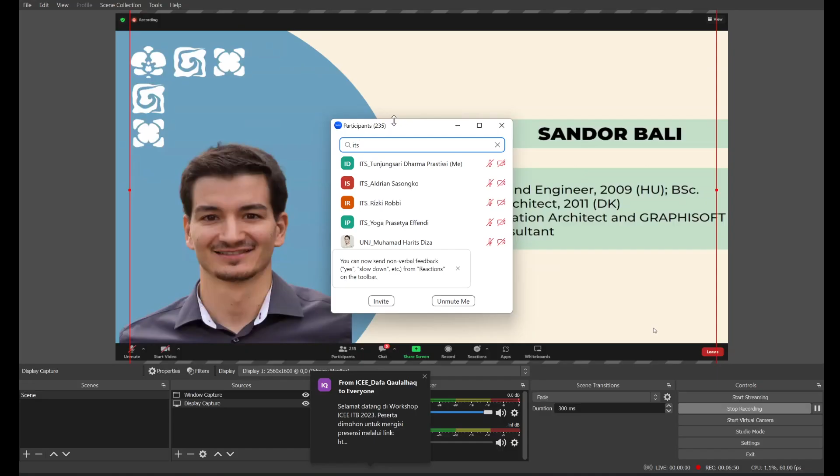Thank you. Okay, hello everyone, welcome. I hope you can see me now, and then I can start sharing my screen.

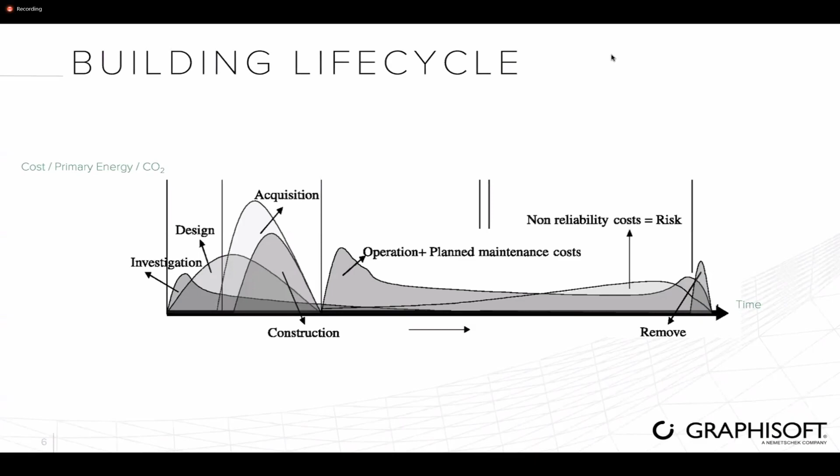But if we look at this diagram in actual scale, you can see that the building operation phase actually spans over 50 years, which, even though it's a lower amount at each segment, on a longer scale it actually matters much more and means more energy usage and demand than during the acquisition, construction, design, and early phases, or renovations and decommissioning.

That's why we have to look into this, because our buildings will stay here for at least 50 years, or usually that's what we aim for. And if we have a bad solution, then it's going to stay with us for quite some time.

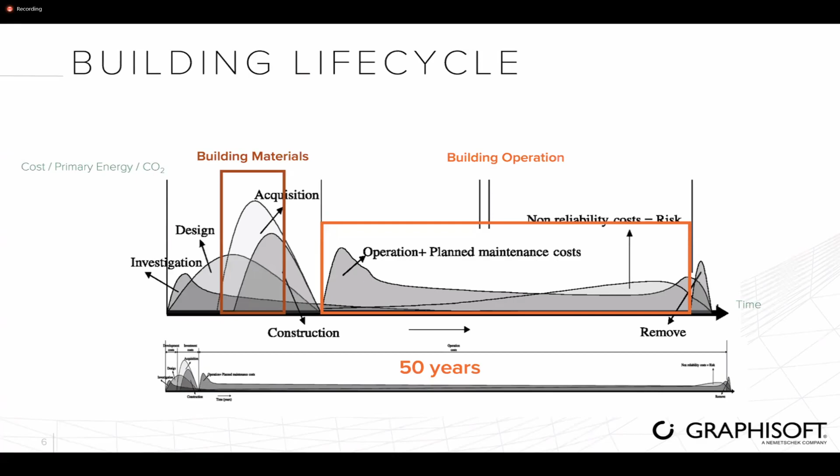So our goal with our tools, and I should say this is the goal of all the energy evaluation tools among the BIM applications, is to make sure that we support design decisions from the early phases of your design.

So how does this look? The first thing is, why are we doing this on the software side? Because our sector is actually one of the largest energy consumption sectors, as I mentioned before. But the good thing is that with the correct design, we can make the most cost-effective changes. A good design on its own will have the most cost-effective reduction in energy consumption.

This is deducted by the IEA, the International Energy Agency, which is an autonomous intergovernmental organization that provides policy recommendations, data, research, and analysis on the global energy sector, focusing on curbing carbon emissions and reaching global climate targets.

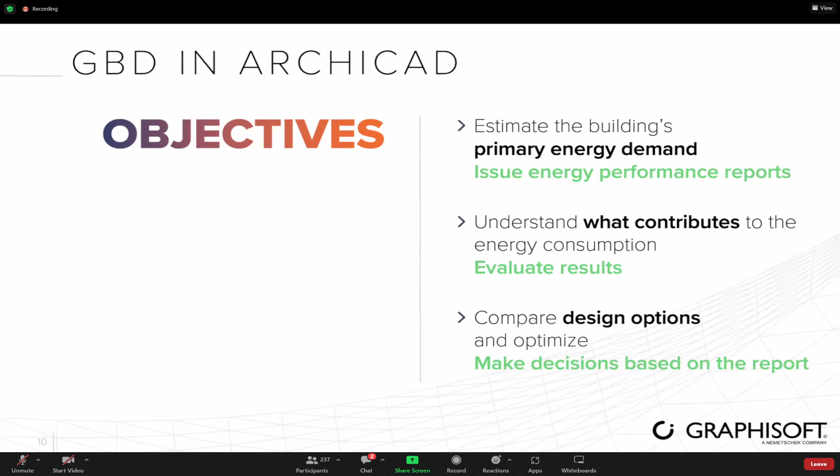And the last objective is that once we have different options and think we've improved our design, we should be able to compare these different versions and make decisions based on the report. So we have different design options, we can compare them, and then choose which one is the way to go from a sustainability point of view.

As I mentioned, the primary energy has an overall impact on the environment. When the energy is processed, there are different energy sources, and they all work differently and are processed differently. This means they have different utilization factors and different impacts on the environment.

We weigh energy consumption differently with regard to the environmental impact. These losses can occur in the energy industry - mining, transportation, processing, or even when it gets to the actual end user. When it goes through the system, there are losses within that system as well. We can see how much energy a building demands, but we have to calculate these losses to see the actual impact on the environment.

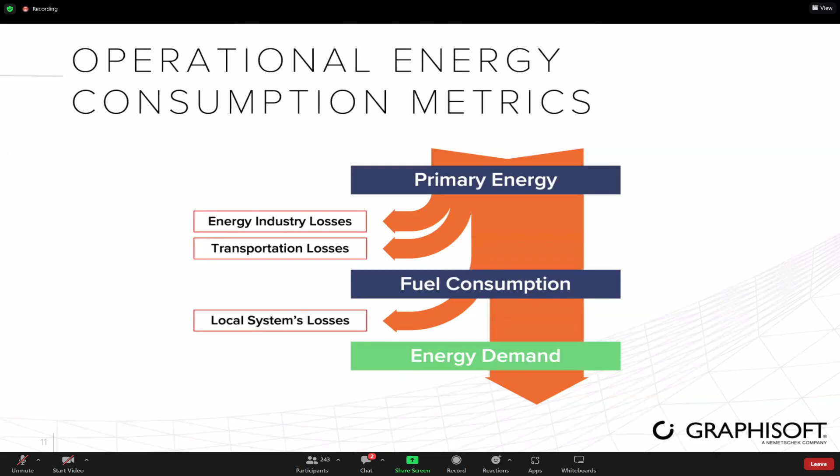Here is an example of a coal to electricity conversion. Starting with 100% as the coal leaves the mine and gets to the factory, it gets down to about 3% of the original energy when used as a light bulb - of course, it depends on the type of light bulb, which we'll look into as well. There can be huge losses, so it's not enough to just consider how much we'll actually use at the light bulb, because the globe demands much more, and we're going to have a bigger footprint than that.

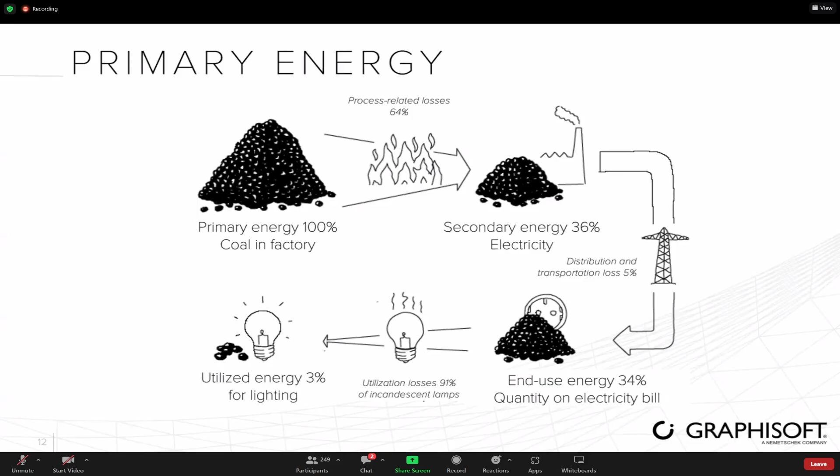Later on, there are so-called primary energy factors, which weigh the different energy sources in our energy consumption calculations. It's very interesting - for example, if you're using renewable energy resources like hydro energy, as in Scandinavian or northern countries, that has a lower impact on the environment. If you're using coal to produce electricity, it has a higher impact on the environment. We'll have a part in ARCHICAD where we can take these into consideration as well.

So what is needed when we're thinking about a sustainable solution? If we look at the different phases of building design - schematic design, design development, and construction documentation - in the first phases during schematic design, we're going to provide purely architectural work: massing, orientation, zoning, and defining building materials. Maybe not in the very first phases, but as the design progresses, we'll define building materials which already have some physical attributes.

In the design development phase, we should already be able to define our low energy building design - what's going to be the low energy consumption and the sustainable solution, at least a first version. Later, in the construction documentation part, near the last phases of the design, we can process our building energy model to third parties for energy certification, and as part of the documentation, we need to submit the performance rating documentation itself. So these are the parts where sustainability should be considered - it goes through the whole design phase in a sense.

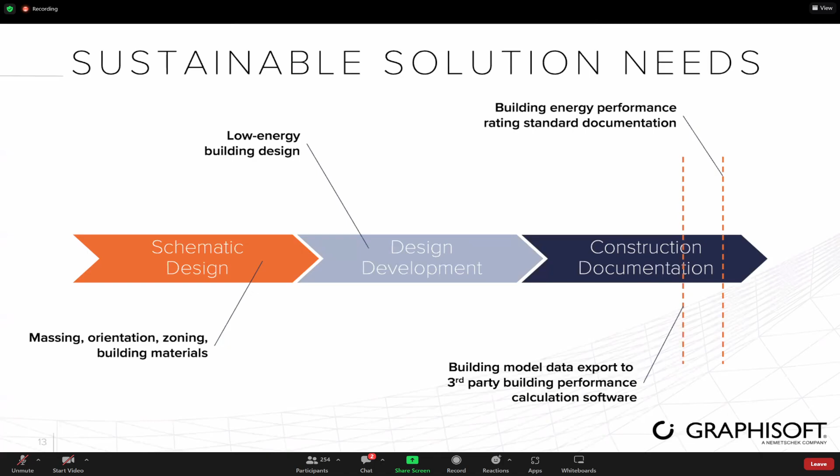Let's see what we can include in these. So what is going to be our energy analysis workflow? The first thing is that in ARCHICAD we're going to prepare the model, meaning we've already had an initial design and have our building elements created. Once we have that, we're going to put in energy-related data.

This can be climate information, environmental information, more details about our building elements - things that normally, from an architectural design point of view, we wouldn't really put into the model. If we have this information, we can switch to the building energy model view. So there is a BIM model, or building information model, and there is the building energy model, which can be used for evaluating energy performance.

So then we're going to do this for the first time, and this is going to be our baseline design - the very first standard that fulfills the standards and local requirements, but doesn't do much more than that. We'll use this as a baseline design and add improvements on top of it, and we'll see how they work differently.

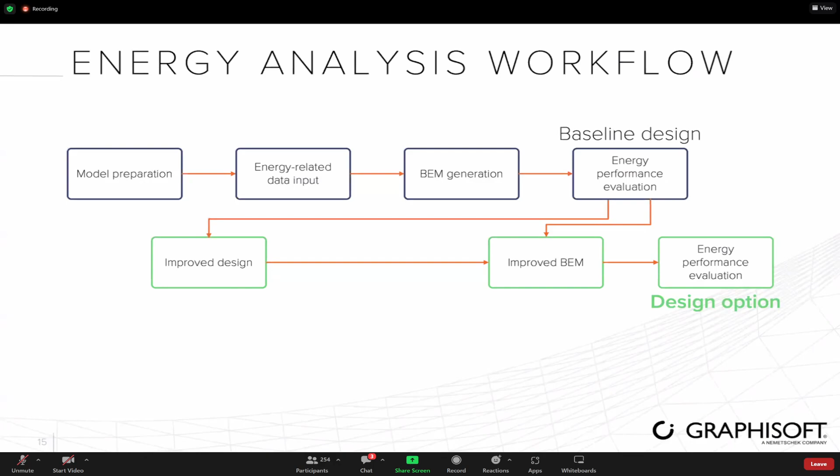We read the report, understand what contributes to the energy consumption, and improve the design. Then we can compare the baseline with the improved building energy model, and do an energy performance evaluation again. So we can say we have a design option compared to the baseline design, and compare these two.

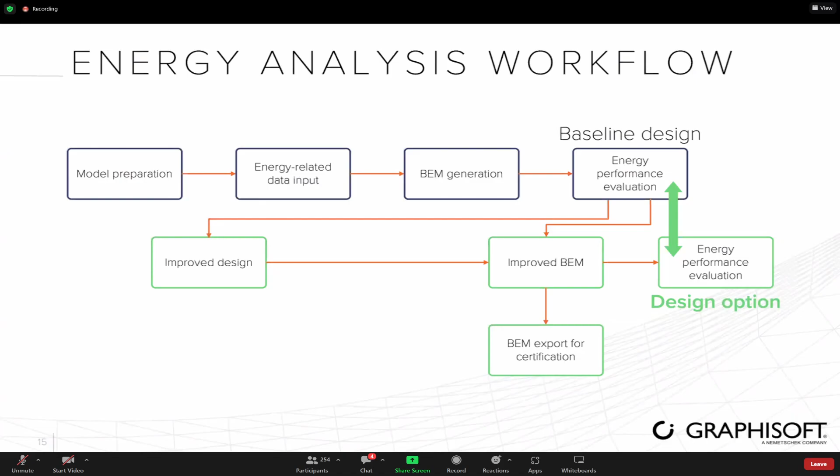This is important at the end of the process. It's always possible to compare by putting two PDFs side by side, but we can also have comparative tables, which clearly show how much we improved, or parts where we are not performing that well with the new design options. And if you have this improved building energy model, we can export that for certification needs as well.

So how does this look in Archicad? Let's say this is our BIM model, and you can see it has the building and the surroundings. We try to model as much as possible of the relevant parts, relevant in terms of energy evaluation. For example, later on when we do the actual calculation, we're not going to show internal furniture or things like that, because they don't contribute to the energy use in the sense that they don't act like the envelope of the building, affecting what happens between the environment and the internal conditions.

Of course, internal equipment, devices, and appliances can contribute and will contribute to energy consumption, but we will put this into the model in a different way, not by modeling the objects.

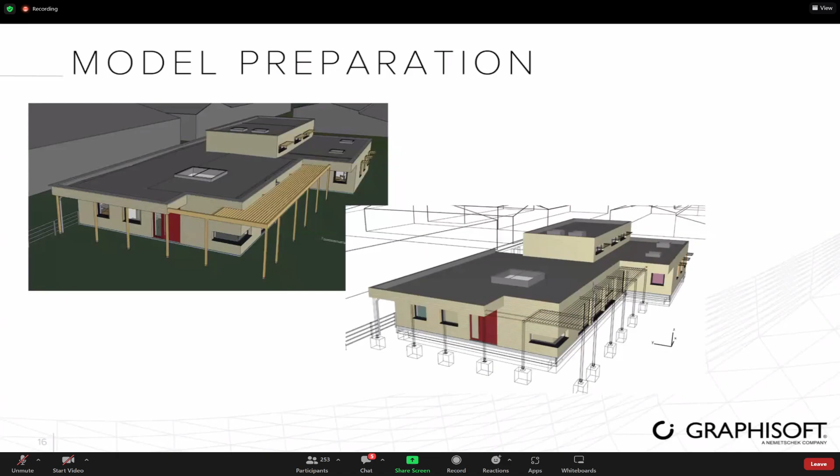Once we have the model, we're going to generate the view which only contains the elements relevant for the energy demand calculation. Then we're going to put in the energy-related information I just mentioned.

This can be the creation of so-called thermal blocks, putting zones into the building model. Zones are our rooms and spaces within the model. Once we have those zones, we can organize them into thermal blocks. For example, the different rooms that function as offices will be collected into an office thermal block. Typically these thermal blocks have the same orientation and the same operation profiles.

It means they function the same way, so they have the same internal requirements. For example, an office has different internal requirements than a storage room, obviously. We don't necessarily have to have a nice temperature in the latter one.

Also, those rooms that belong to the same thermal block will have the same building systems, whether that's heating, cooling, ventilation, or renewable systems or anything like that.

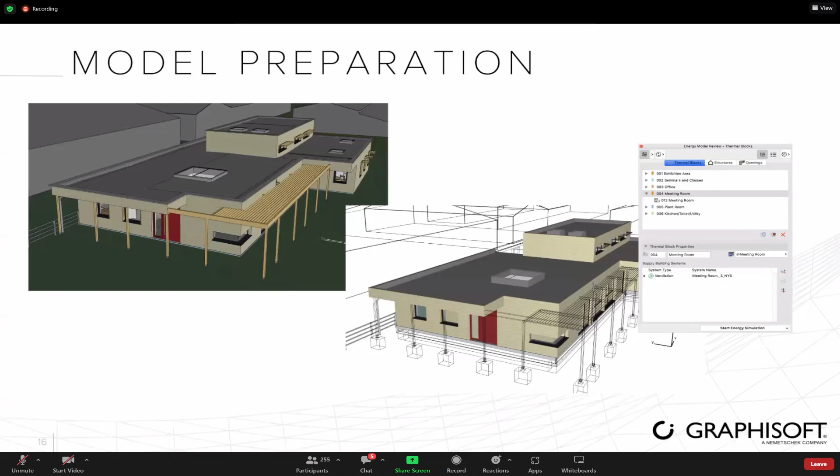Strusoft is a Swedish company that develops the VIP engine we're using in ArchiCAD to do the energy calculation. Strusoft also has its own standalone energy evaluation tool, and they have this climate data server, so ArchiCAD can directly get the information based on the location coordinates.

However, it's also possible to use other international standard climate data files. One of those is the EPW format file. These files can be downloaded from a lot of sites, but probably one of the most referenced is the Department of Energy from the United States. The EPW is an Energy Plus weather file, and Energy Plus is also an open source engine used in many cases for energy evaluation.

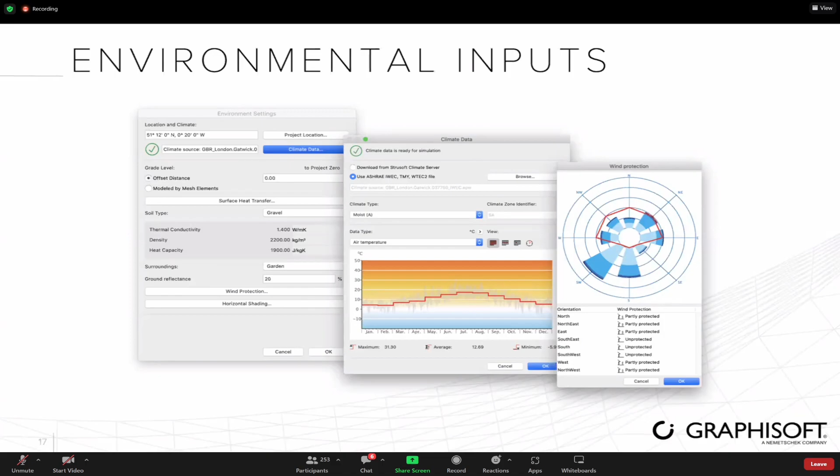Here we need a little bit of knowledge about building physics and the values, but if you just leave them as defaults, you can still compare different design versions just as efficiently. What is interesting is the wind protection and the horizontal shading. There are two things we can put here, indicating how much these different directions are protected by the built environment surrounding our building.

So the other thing I mentioned is the thermal blocks. Here we have the zones, and in this palette we can choose a view where we make the whole model a wireframe view, and then just group the different zones into different thermal blocks.

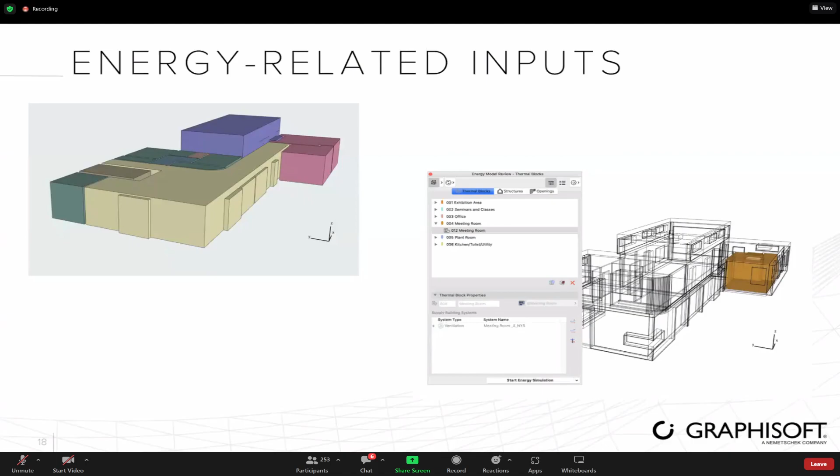So what is a thermal block about? As I mentioned, if rooms belong to the same thermal block, it means they function the same way. For example, if we have the meeting room thermal block, we can choose from a preset: meeting, conference, or seminar room. These have standard human heat gain values, service hot water load, and humidity load values.

We can also choose daily schedules, so we can differentiate work days from non-work days, or in the case of classrooms or schools, differentiate when we have actual teaching versus school breaks or recess weeks. Obviously the demands are different in each case.

If I choose to have a daily schedule for work days, I have the daily profile editor where I can set that from 7 a.m. to 6 p.m. we should have the internal temperature between 20 and 26 degrees. This is the internal climate requirement, or internal functional requirement - what we want to achieve.

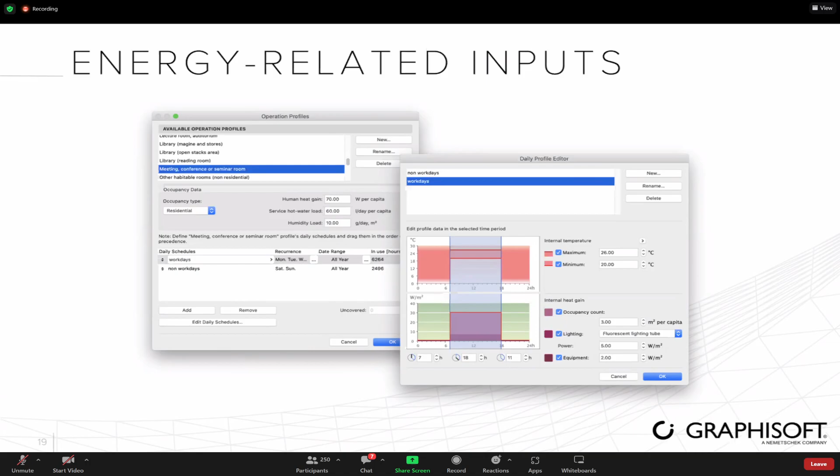So later on, these are the things we will change to see if there is an improvement. Okay, before we do that, I will go into Archicad.

I'm just asking for some help - I think I have to resume sharing. When I switch to Archicad, it tells me that screen sharing is paused. Do you see Archicad now? Can I get some feedback on that? Not yet, not yet. Okay, that's interesting. I will stop sharing and share Archicad instead, and we'll see if it works that way.

Okay, so now you can see Archicad. Basically, this is what I mentioned - here we have the building, a very simple one. We oversimplified it so that inside we don't have furniture, because it's irrelevant from the energy calculation point of view.

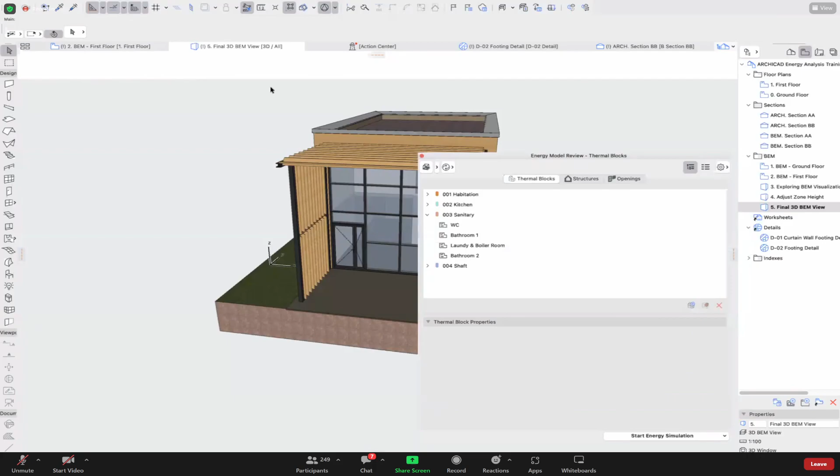There is a dedicated view in our view structure, so I can always get back to this particular view. Then there is the energy model review palette in Archicad, which I can open under Design, Energy Evaluation, Energy Model Review. All those settings I already talked about, and will mention later, are accessible here.

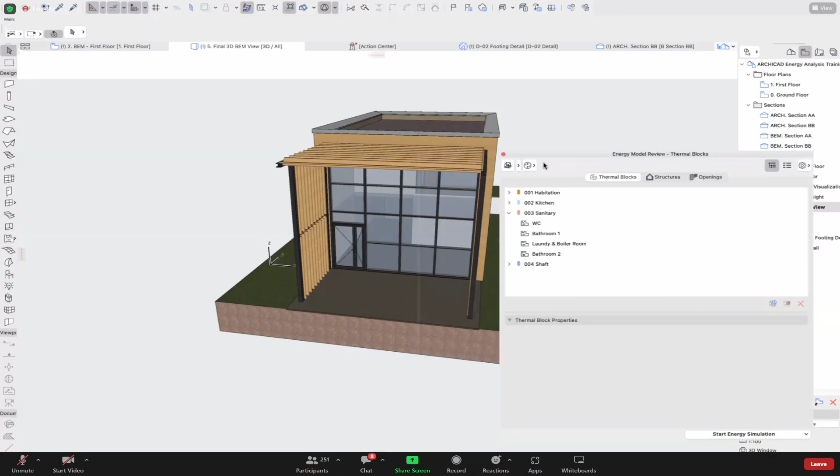So I can have this wireframe view, take a look at my zones, the rooms, and show the unused zones. This is interesting if something is not added to a thermal block - for example, here you can see there is a room that gets highlighted, giving visual confirmation of what belongs together.

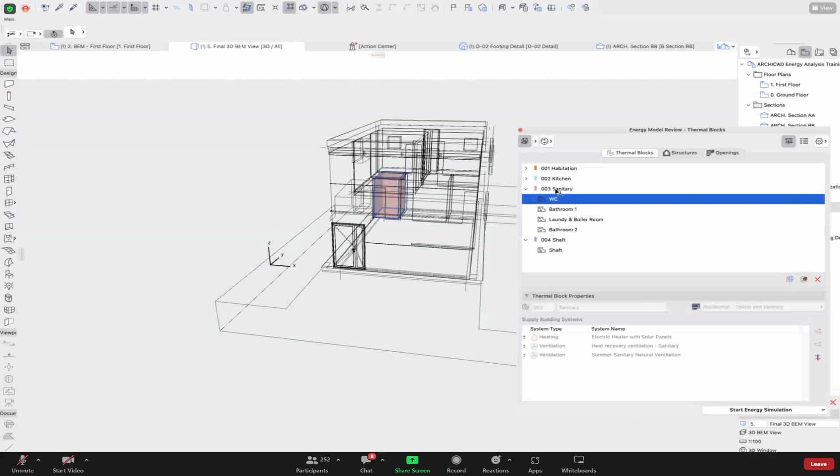I can create new thermal blocks and add zones to them - just as easy as that. Remove this. You can see that if I show unused zones, it highlights them.

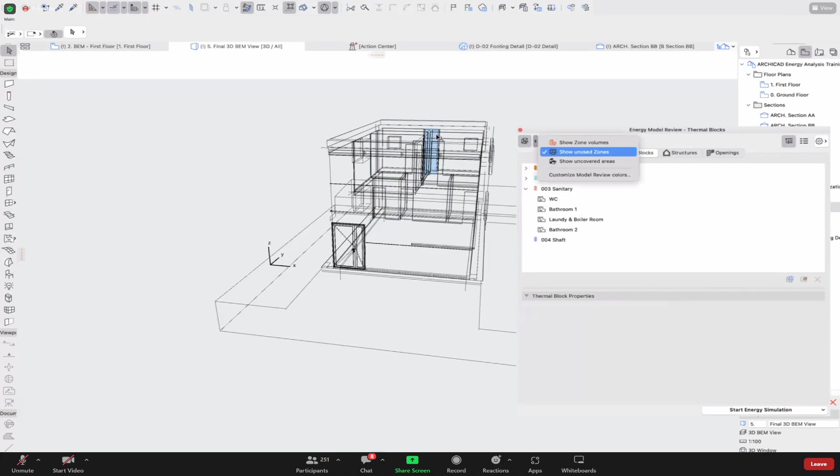If we want these, then I can choose to add the one that is not assigned yet. So now the shaft is added back.

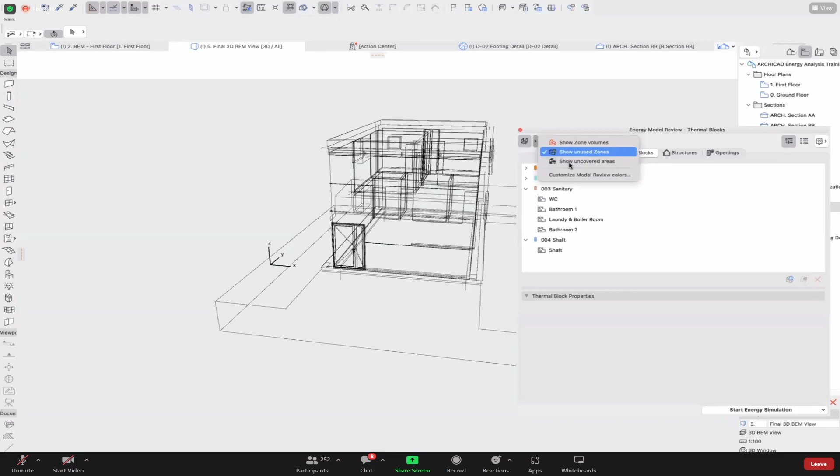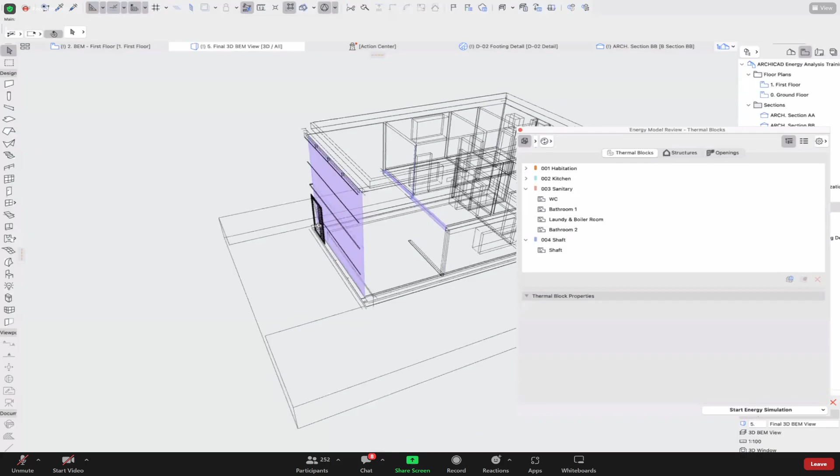But the thing that can happen here is that from a modeling point of view, my model might not be correct. I'm in a different phase, which is not suitable maybe for the energy evaluation. So what's important is to show if there are uncovered areas or not. For example, in this case, there's a curtain wall that has a full face, and this part is not going to be considered in the energy evaluation as of now, probably because the zone behind it is not touching it. So this is something that needs to be fixed in the model.

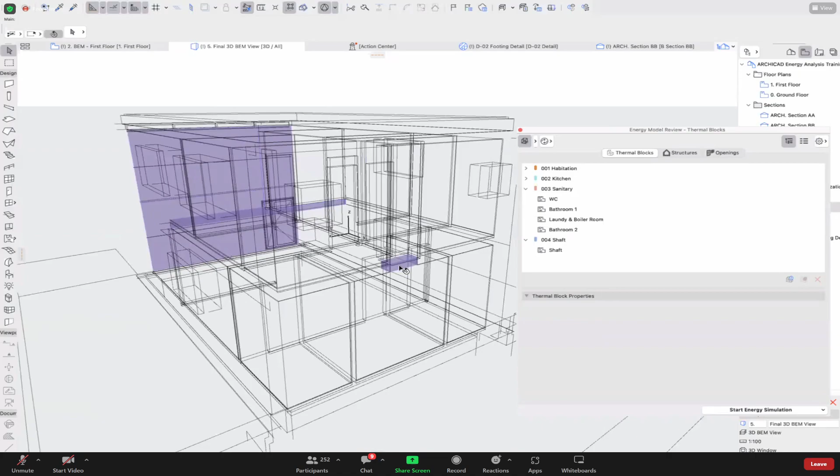But then there are also going to be small ones like these, which we can think about whether it's worth considering or not. Actually, this is between two internal zones, so this isn't that serious. Maybe the one that should be considered is this, because this is touching an external surface, but it's relatively small, so this could be ignored as well. I'm not going to fix it now, but basically this is what you can see, and this is what you set up first.

So what I mentioned is that, let's say there is the habitation thermal block. You can see these are different systems that we're using. If I remember correctly, this one is... yes, this is Germany. So we have 4 seasons here, that's why we have heating, cooling, and 2 types of ventilation as well.

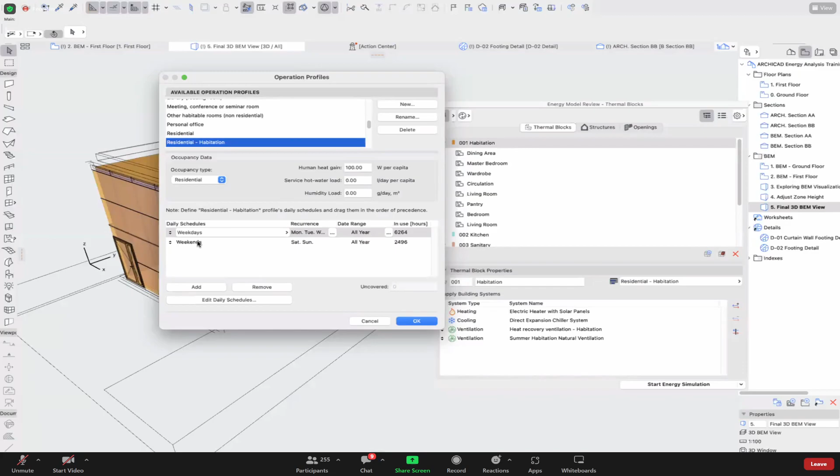And here, if you look at the operation profiles just for the habitation, you see that habitation is a residential habitation profile. So maybe we can check what that means. We can differentiate the weekdays and the weekends, and in case of the weekdays, we can edit the daily schedules. During the early mornings and the evenings, we have 20 to 26 degrees, then it's 18 to 28 in the middle of the day. Strangely, we're not using any equipment during the day, but we're using equipment outside the working hours.

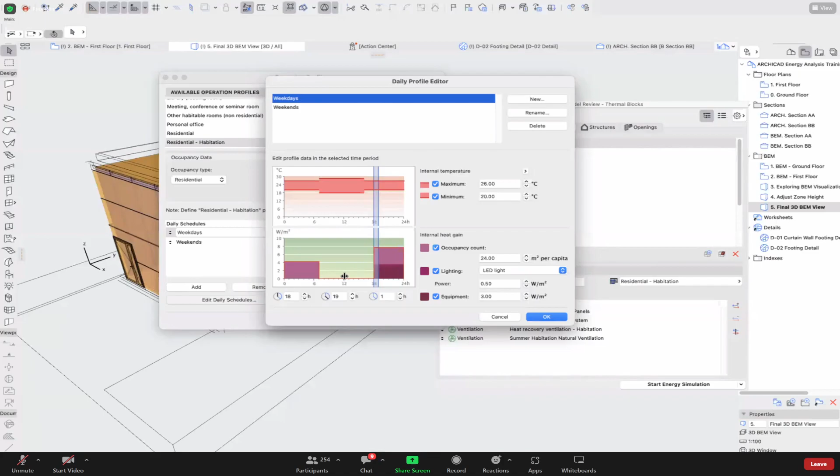Well, it depends. If it's a regular apartment and we go to work, to the office, then obviously there is very minimum energy usage. Probably there's still something from the equipment, so something should still be here. But this was the idea behind this setup.

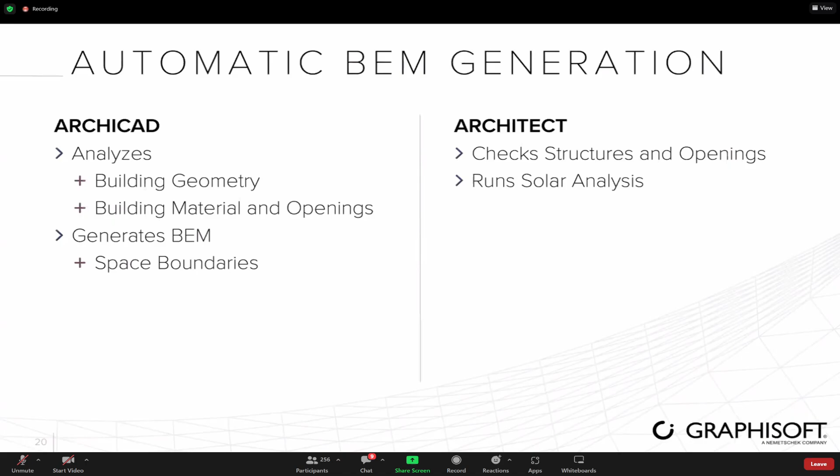Okay, so these were the energy related inputs, the internal requirements, and so on and so forth. But what happens after this? What is the actual energy model? What ARCHICAD can do is check the building geometry, what you have modeled, and what are the materials, the physical properties of the envelope itself, and how that is connected to the space boundaries. So basically, there are the zones that I mentioned, that they are part of the thermal blocks. The zones are going to be the logical connection between the external conditions and the internal requirements. As an architect, what we can do is check the structures and check the openings, and on the openings, we can run solar analysis. I haven't edited here, but later on we can also add more details related to the structures. So let's see these parts.

Structures, also based on the zones. The next page in the energy model review is going to be the structures. So every element that is a boundary of the zones of the rooms that we have is going to be listed here. Some are going to be theoretical ones, and they are in this case called virtual boundaries - for example, boundaries between 2 adjacent zones that don't have a physical boundary. But there will also be, most of them are going to be actual real boundaries. And then here we can use what type of structure was used and the performance, the energy performance of that structure.

And in this case, I think the most important thing is the U value. This is what is set as a requirement in most of the cases. The good thing is that if we have our structures with actual building materials, then we are also going to have the U value automatically calculated based on the physical properties. So we don't have to do anything about this.

However, it can happen, especially in the early design phase, that you are not using the actual building materials. You are just using a generic building material, a dummy building material, which doesn't represent the real physical attributes and the real physical performance of what is going to come later. So in this case, how can I use something imaginary to get exact results? Well, it's possible to manually override the U value. So for example, if I have a dummy structure and the U value is nowhere near the required standard, then I can just say that, okay, I'm just going to put in this case, 0.28.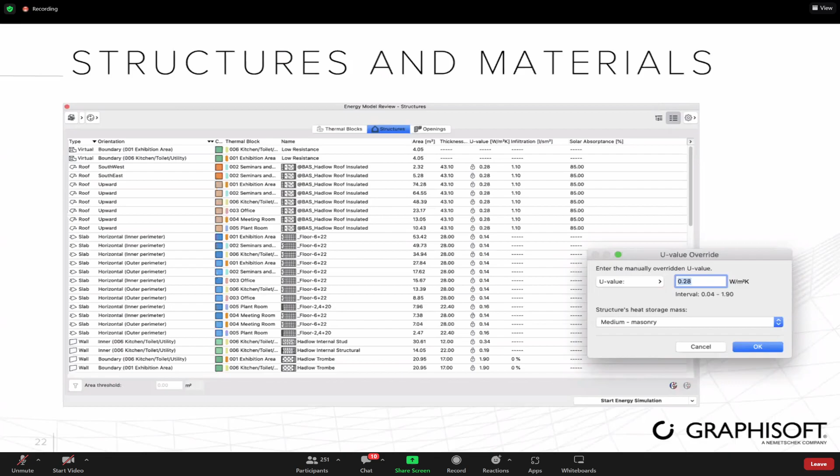So how much energy is actually going to be needed to operate the building. So this was the first thing, the structures. And the second one is the openings. Similarly, the zones are going to recognize the elements that are available on the boundaries - the doors and windows, and in case of roofs, the skylights. And the openings will also have their own physical properties, which we don't have to know ourselves.

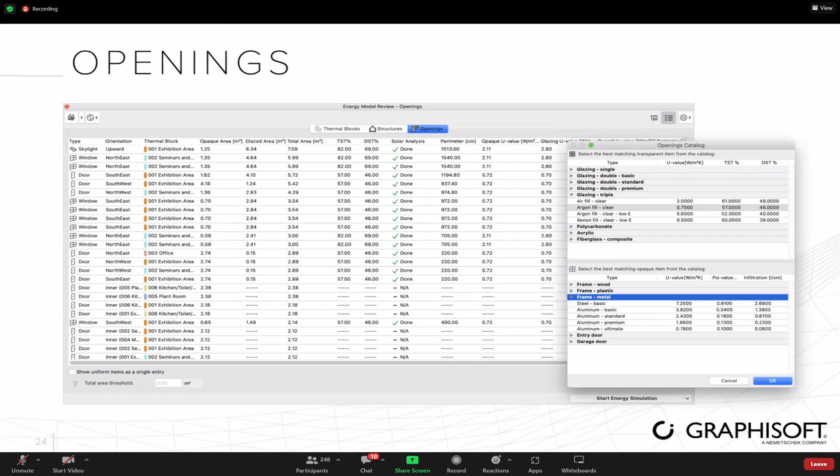But basically, whenever we have an opening, we can open the catalog and choose what the opening is made of - what type of glazing and what type of framing. So here we have real life options and items with real life physical properties. These are given. You just pick what type of openings you have, and then you're already going to have an actual opaque U value, and an actual glazing U value as well.

Okay, this one, the next, would be defining the building systems. But again, we're just at the very beginning of the process, so we have no idea what the building systems will be. In this case, at least as an architect, knowing the climate and reading the climate data, we will be able to decide whether we are going to use heating or cooling or both, or what types of ventilation systems we're going to use. So these can be put in, at least their names, but we don't have to specify them. We're just going to say they are not yet specified, or natural.

So again, what does this mean? It means we don't know what it is or how it works, but we say that it is going to fulfill the requirements. If there is the energy demand based on the requirements and the environment, these building systems will fulfill those demands. We don't know what they are, but they will work. And in this case, once we are done with the energy calculation, it is actually going to show us the demand - how much energy is needed, how much energy we need to provide for our building. So first, we can use placeholders to get the demands of our building.

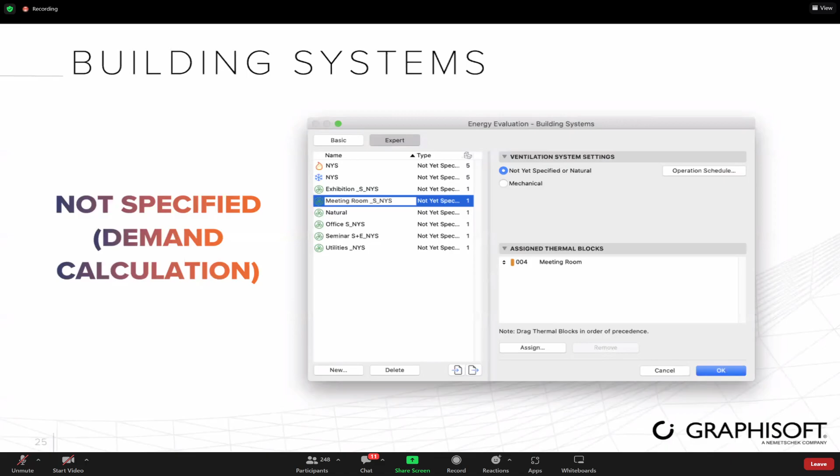And this is going to be basically the result of the energy evaluation. So maybe here now I can just probably switch again to Archicad and then reshare with Archicad, just to show you that part as well.

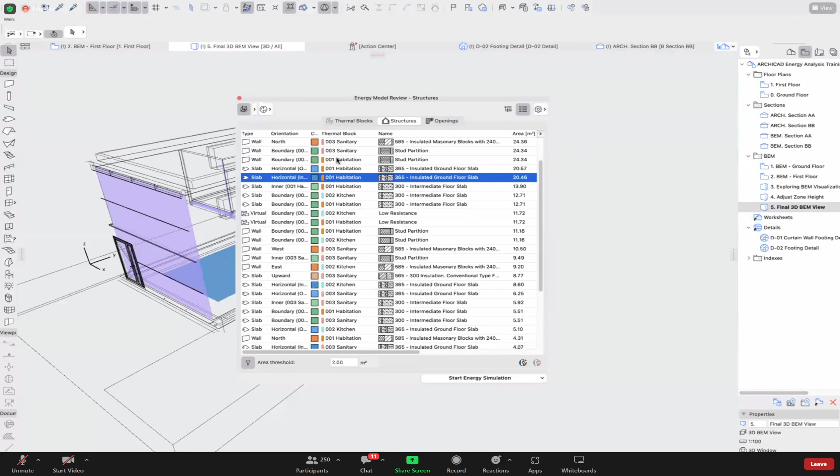Okay, so when you are here in Archicad, this second page is the structures. In all these pages, you can choose between doing a tree view or a list view. For structures and openings, it's probably the list view that is more useful. And again, when you select the different types of items, it shows you in the model where those things are. Openings, very similarly, are going to be highlighted in this system as well.

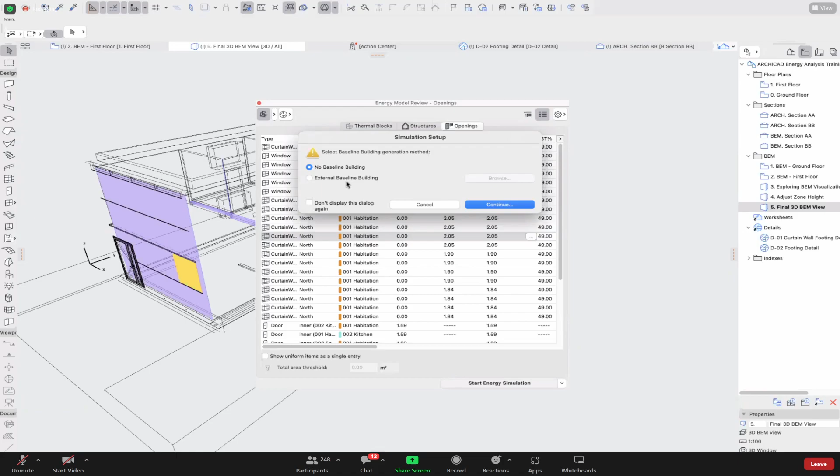Okay, and basically this is what we do to start the energy simulation. What you see here is going to be more important later on when we do comparison - if we do comparison, we can already use an external baseline building. Here in this case, we're not going to do that, I will just continue. Usually before every evaluation, we have to do a final update just to synchronize everything. I'm not sure how much it's going to take, it should be pretty quick, but basically it is going to give me the report sample, where I can choose what types of chapters I want to include in my building.

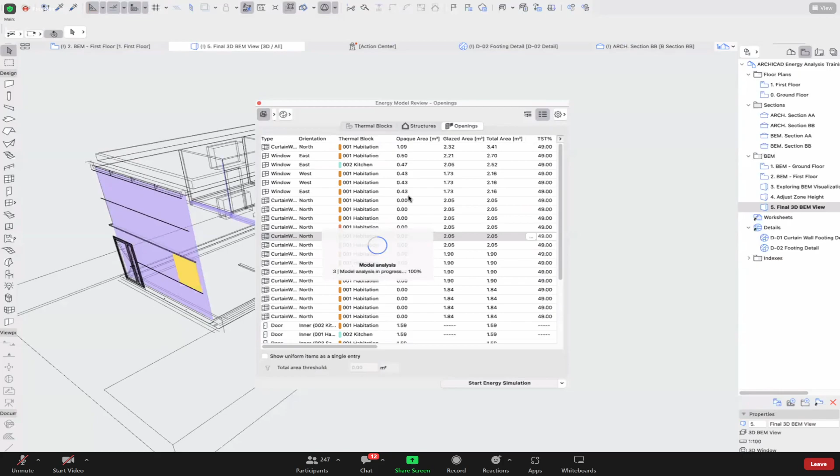Okay, just checking how we are doing with the time. So far, I think more or less okay. All right, so that's the thing.

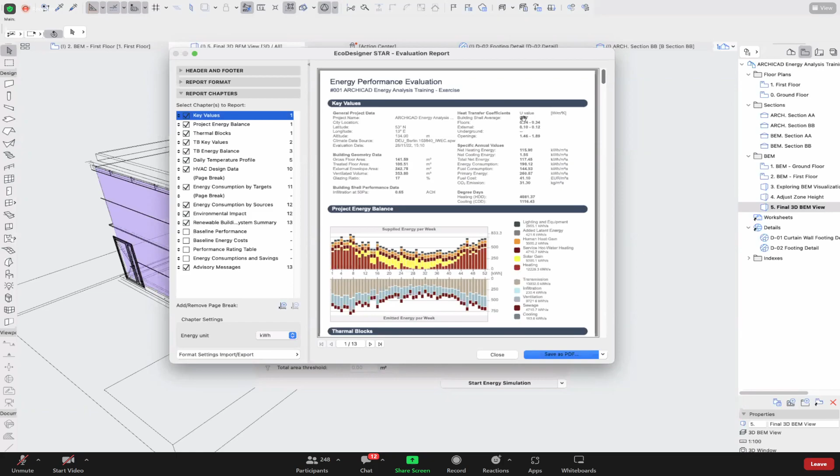So here is the evaluation report, and there are some format-related options, to change a little bit the style of the headers and things like that. But actually, what is important for us is what are the chapters that are included. So one thing can be key values about the overall project. Most important is probably the heat transfer coefficient, the U value for the building shell itself - so the overall building has to perform in a way. I'll just make this a little bit bigger.

So this is going to be very important. What is also going to be very important here is the primary energy and the emissions. So this is what we're putting on the environment, and this is what we're actually using, the total net energy. You can see that actually more than twice the energy is needed from the environment.

This is an interesting one, degree days, which describes the environment. Heating degree days is the heating requirement. There's a formula for how it's calculated, but it's a bit complex at first sight, so I'll oversimplify it and say heating degree days is basically the number of days when we need heating, and cooling degree days is the same but when we need cooling.

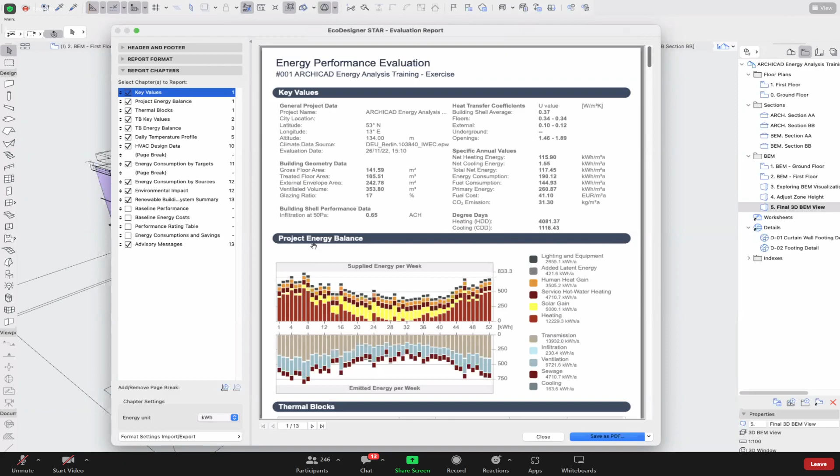We can have the project energy balance, so what goes in and what goes out. You can see solar gain, human heat gain, that's supplying energy. But there's also energy that goes out through the gaps of the windows, or depending on the structure types. Obviously concrete is not going to have much infiltration, but lightweight structures will have more.

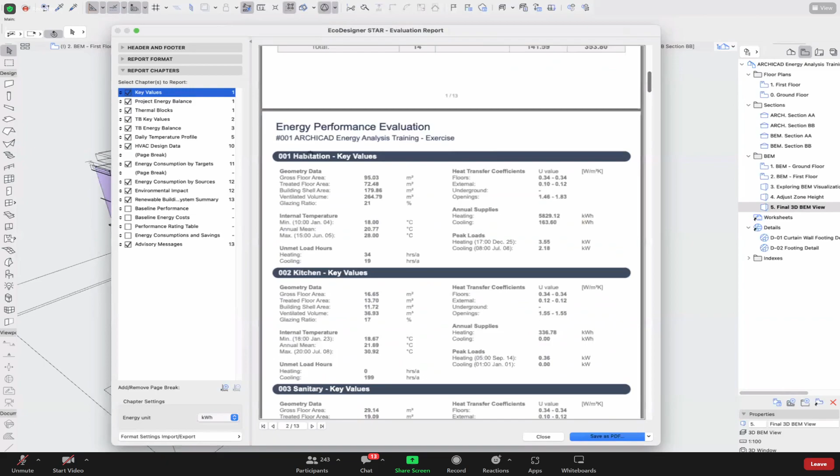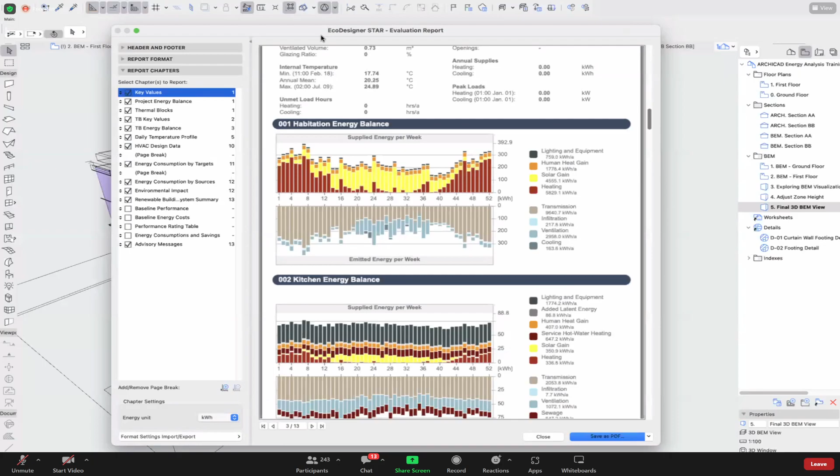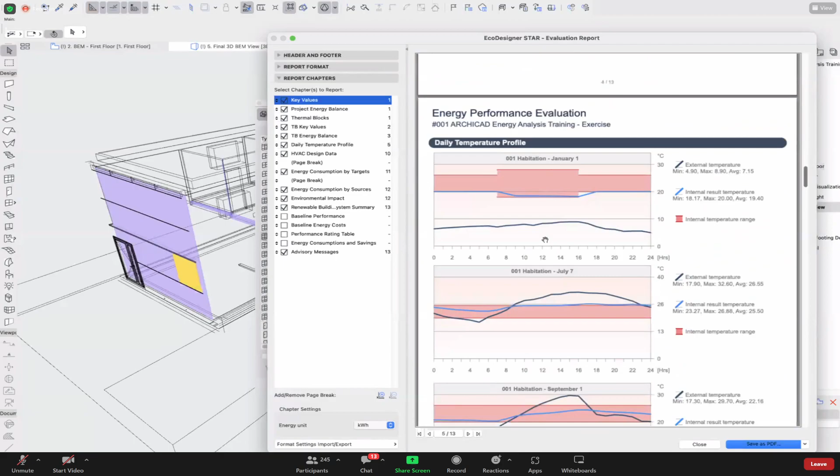So these are interesting graphs to compare what contributes to the supply and what contributes to the losses. You can also break it down to the different thermal blocks, to see how each one works. Obviously the habitation with big glazed surfaces has a lot of solar gain. The kitchen at the back of the building doesn't have solar gain, but lighting and equipment contribute to energy consumption.

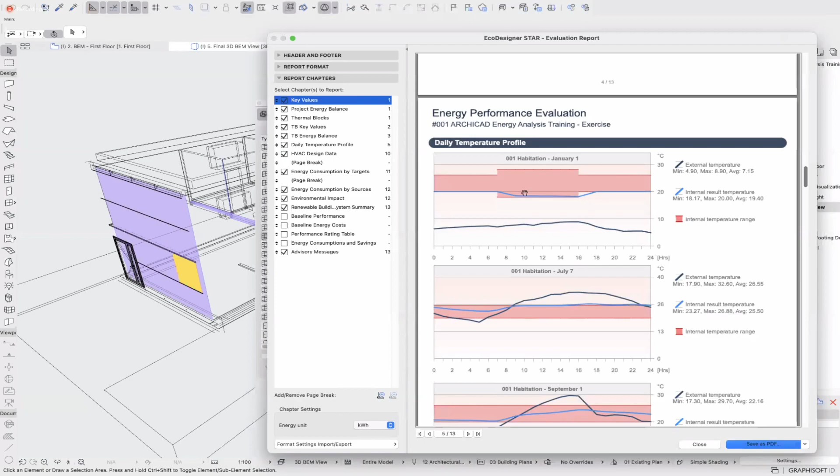So these are probably the most important ones: the daily temperature profiles, which are the demands we were setting up in the operation profiles. On these graphs we can see how they're going to be fulfilled by our building systems. Externally there's a very low temperature, internally we keep it at a minimum, and here, because we have more room to work with the temperatures, we can even let it go lower. At this part, this is going to show up as a so-called unmet load hour, meaning the requirements are not fulfilled.

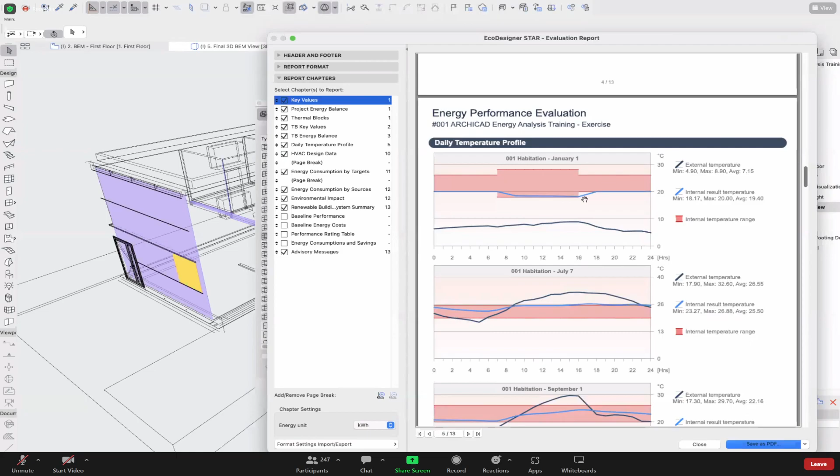So in this case we can consider that heating rising here is going to start a little earlier, or we can just say it doesn't matter, we can live with this. We can choose different dates for the same thermal block, and we can use it for all thermal blocks, so we can have a lot of these and use it as a first evaluation. Here we're not even comparing anything yet.

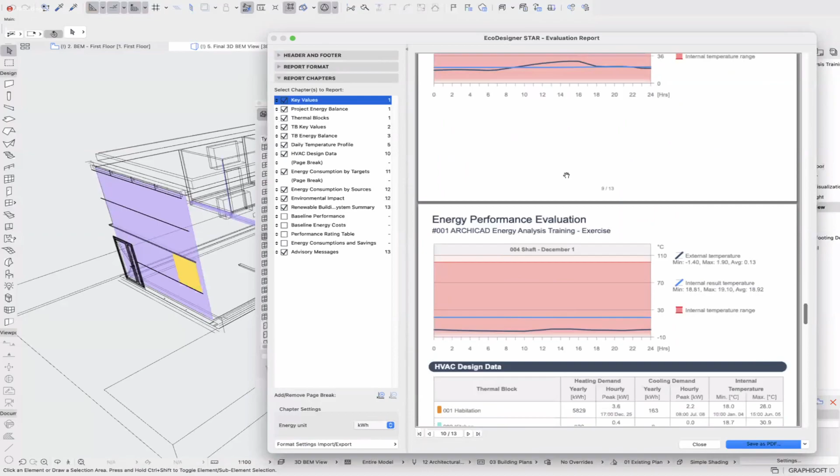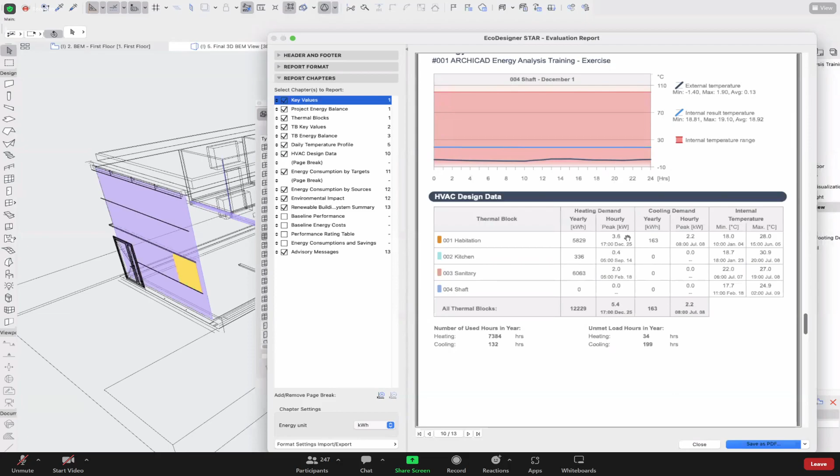This is what's important, that we can get the design data. Here you can see this shows up as heating demand and cooling demand, meaning what is the peak demand. This is what we'll have to provide with our building systems. So when we define the building systems, I'll have to consider that it has to provide at least 3.8 kilowatts of performance. So if the minimum we can buy as a heating system for habitation is 5 kilowatts, then I'm going to put 5 kilowatts into the specified building systems. I hope that makes sense.

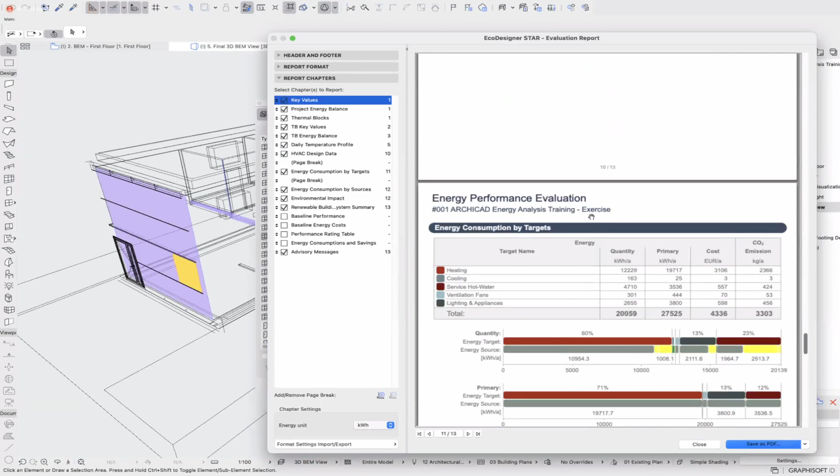I'm not going to go into these for now, let's go back to the presentation. Okay, so I'm just going again.

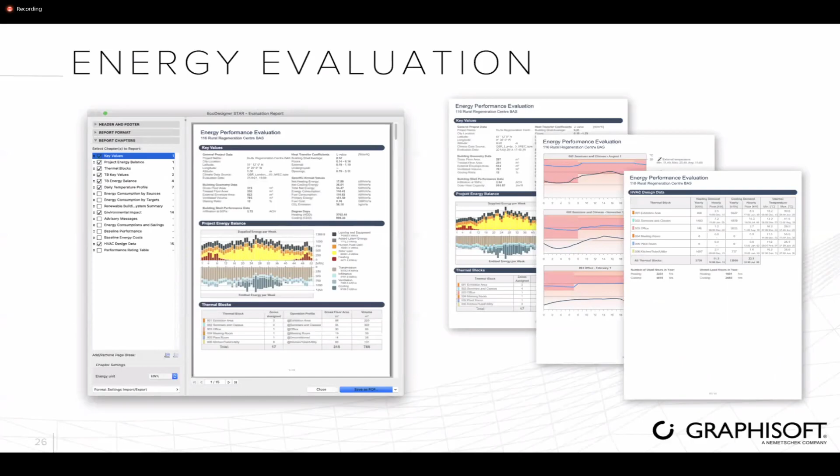Okay, so here is the energy evaluation, the pages I just mentioned: daily temperature profiles and the design data. So this was the very first thing, and we've actually completed three steps. So here comes now the optimization itself. We created the baseline building with the not-yet-specified building systems, did the simulation, and in the table you could see what the demand is. We take a look at the whole report and review the energy performance, so we know what contributes to the energy consumption, and now how we're going to improve this.

First we're going to take a look at what are the different options that we should use. Should we use renewable sources? Should we use shading? Should we use solar panels? What is the right solution? Once we have our different solutions, then we're going to execute sensitivity analysis.

This sounds very scientific, but basically what it means is that we're going to run the energy evaluation again and again, and see which one has the biggest impact or the best impact on our design. So we'll probably come up with maybe 5 or 6 optimization options, and it turns out that 3 of those are actually going to work. So that means we determine the project-specific low energy solution set.

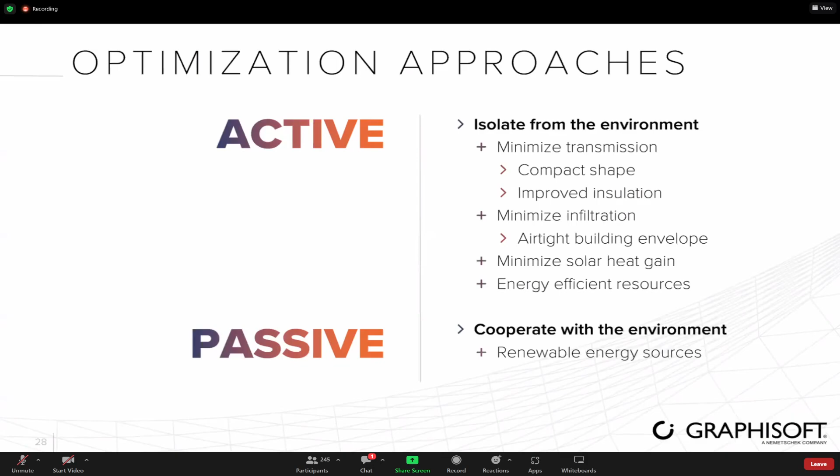Okay, so let's take a look at this: investigate optimization options. There can be two approaches, active and passive. Active means we're working on the building itself, and passive means we're working more with the environment itself. There are going to be a lot of active ones, usually these are the easiest to do, to change the design a little bit.

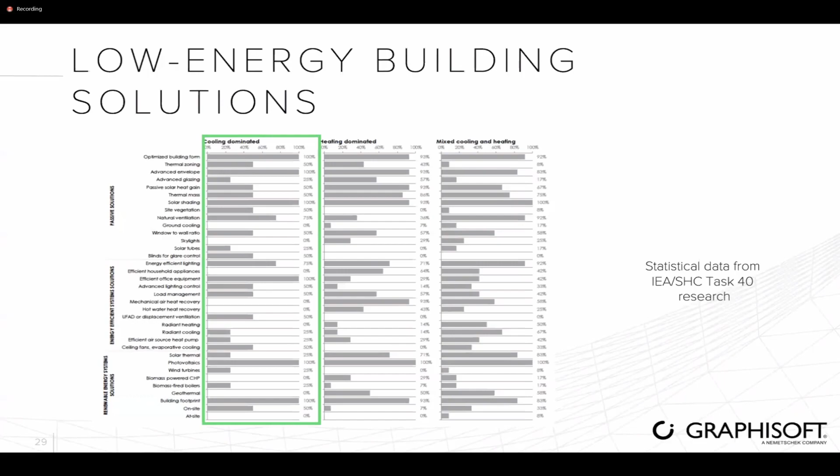If we look at the different types of climates, we can have cooling dominated, heating dominated, or mixed cooling and heating. For example, the sample building that I show you in Archicad is mixed cooling and heating because it's in Germany. If we look at Indonesia, that should be considered cooling dominated.

So you can see on the left side there are three groups: passive solutions, energy efficient building system solutions, and renewable energy systems. Some of the renewable energy works—photovoltaics works, using thermal energy to create electricity, that works pretty well. But all the others don't really help, right? So we need to deal with cooling, and the renewable sources and improved building systems mostly help with the heating. This is what you can see also here.

So what we're going to look at when it comes to the Southeast Asian region is that we're going to optimize the building shape, the form. We're going to use better construction types at the envelope, better insulation, solar shading, and use natural ventilation, for example.

Okay, so this is one thing, and the other thing we should consider is efficient office equipment—LED lights, replacing devices more frequently to have lower energy consumption, things like that.

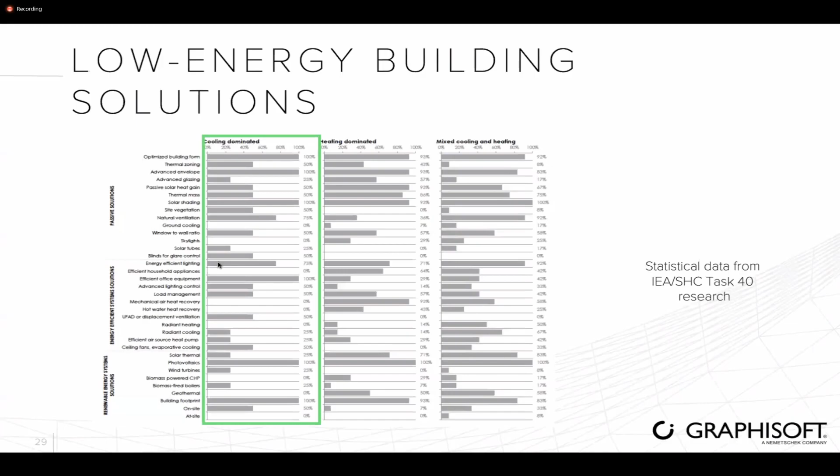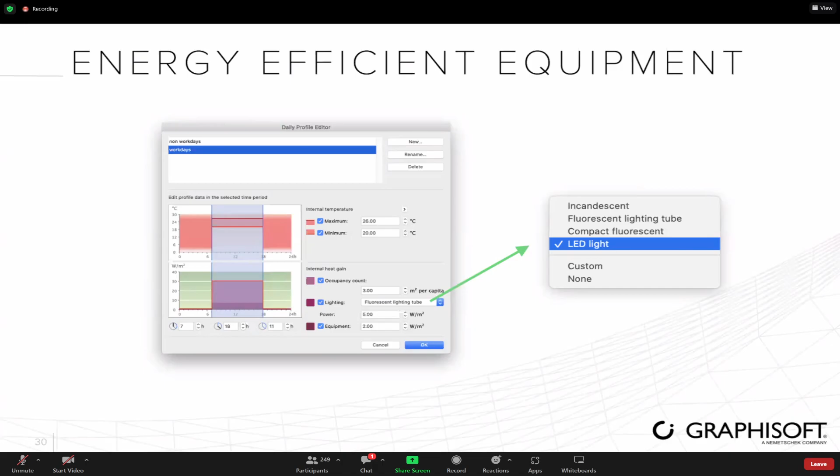Okay, so we are going to basically go through the same settings as before, but now we're going to change them. First, you could see that fluorescent lighting tubes were given as a default for the baseline building. So we can change that to LED light. And if we know exactly the wattage of the equipment and how much we can improve there, probably we need some external parties to help with those numbers—at least an MEP engineer, so the numbers can be changed as well.

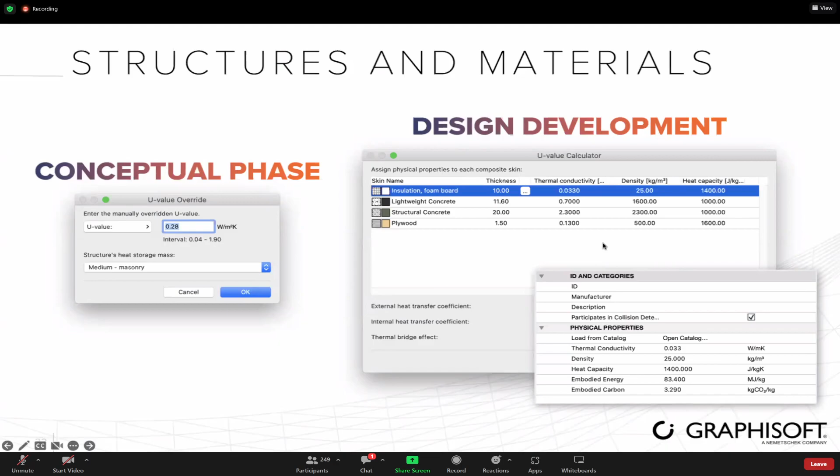Okay, the thing I mentioned already about the structures and materials in the conceptual phase—we could use the manual override of the U value. We just said that this is going to happen. But then when we're in the design development, we're going to use actual building materials with actual physical properties, and those are also going to have the final U value.

In case of the structures panel, there's a very interesting thing: you can use 2D detailed drawings to be converted to linear heat transfer values. So basically, we can see there is a connection of the curtain wall to the ground slab. In a heating dominated environment, but also in a cooling dominated environment, there is a heat transfer through the frames—that's why it's good to have it insulated.

And this heat transfer is happening all the way through the front facade. So we can say that this linear heat transfer happens at 6,300 millimeter length—just the bottom part, let's say, or the side, top, and so on and so forth. So we can use those detailed drawings and create these linear heat transfers.

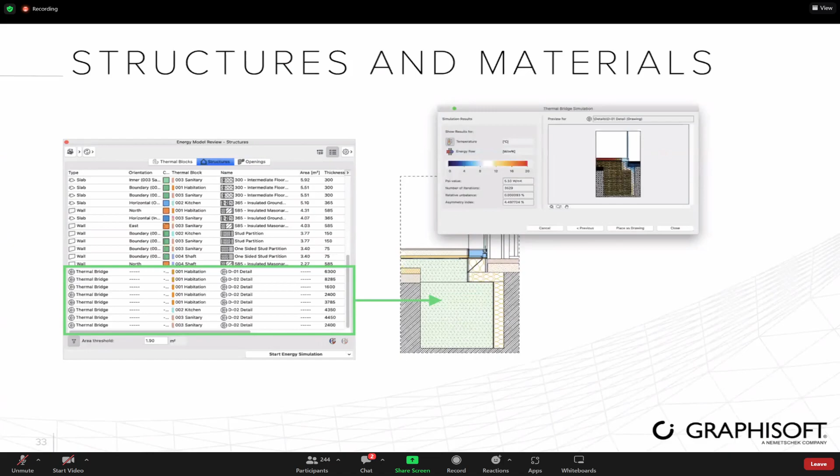But it's not considering these different linear gaps, basically. So what we can do there is we can analyze the detail, and it is going to give us colored graphics, which we can use and put next to the drawing. This is also helping us explain it to the client why we are using this. Obviously, if they see something full of red, they will understand better that there is a heat transfer, and this is where they lose money and where the operation is potentially going to have bad results. So this is additional information to add more precision.

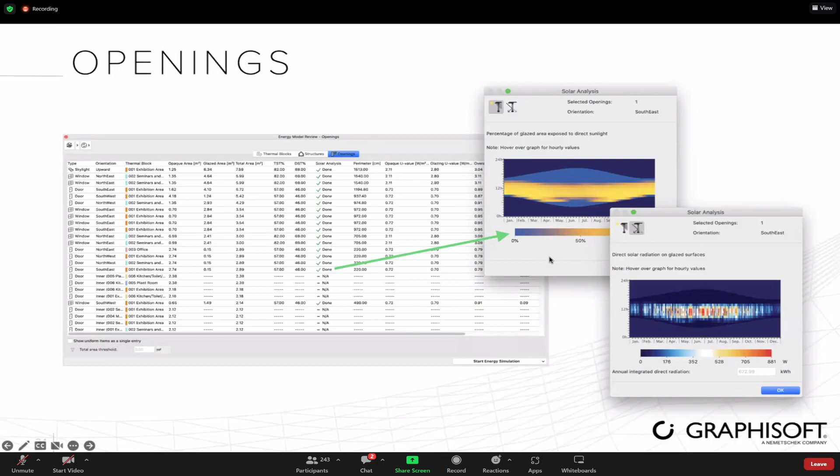In terms of the openings, we can run solar analysis. So what happens with the shadings - how do these actual modeled shading elements affect the solar heat gain? Typically, in cooling dominated countries, that would be important. So you can decide, let's put some more shading if there is too much yellow in the graph. Previously we just defined what the material is going to be. Now we can look at the solar analysis, evaluate it, and make changes depending on that.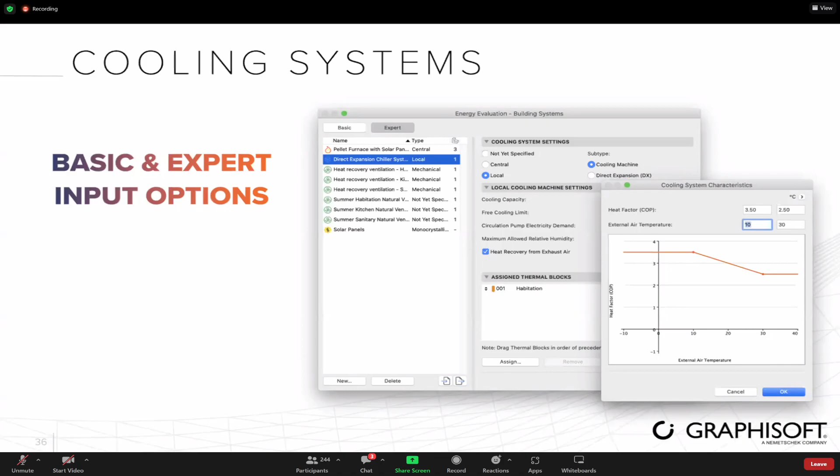I'm just mentioning the cooling systems here because that's more relevant locally. But basically, this is where we can make use of some MEP knowledge, because it can be MEP heavy as well. There are two options, basic and expert. Here you can see the expert option where I'm going to change from not yet specified to local, central, or detailed settings. It's good to know what to put in, but what matters is that this is where you need to set the performance based on the demand calculation. As I mentioned, if the heating demand peak was 3.6 kilowatts, and if I buy a furnace that comes in 5 kilowatt steps, then I'll just say the pellet furnace is providing 5 kilowatts.

But here is another example about the ventilation. You can choose different types of components. Again, this requires probably the knowledge of an MEP engineer, but you can switch back to the basic, and it will also be good for estimations.

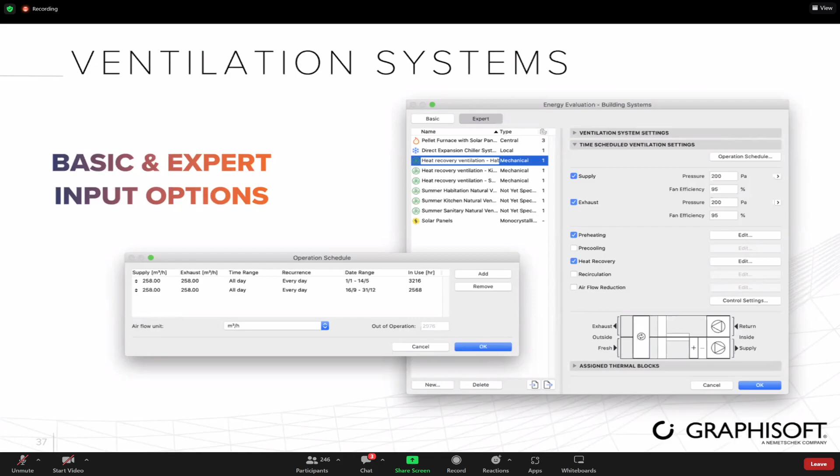When you use these ventilation devices, you can also have an operation schedule, which is very similar to the operation profile. But in the operation profile, we say what the requirement is at what times. And in the operation schedule, we're saying how the devices are going to work at different times to achieve the required demands.

And then here we can also use renewable energy, so wind and solar photovoltaic. If we're using solar thermal panels, that's an option under heating. So that's also there, but we make a difference between photovoltaics and thermal panels.

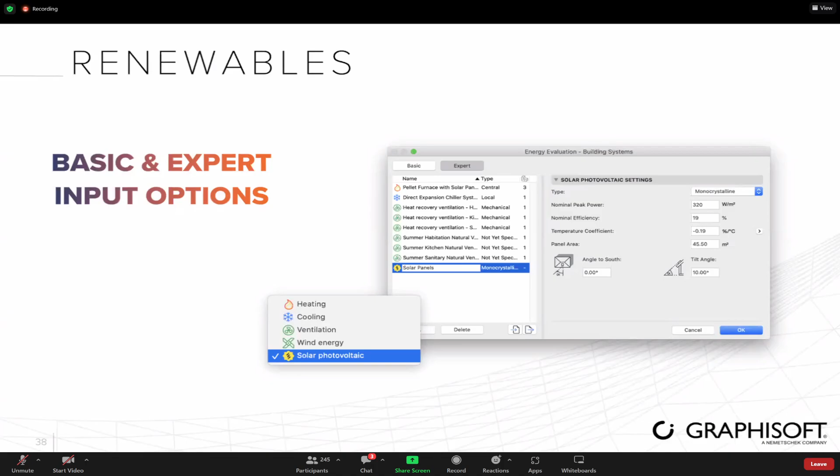And the last part, which is going to contribute to the overall calculation related to the environment, is the energy source factors - this is what I mentioned in the very beginning. So how much each of the solutions is weighing in terms of impact towards the environment. Sorry, strangely there are actually some errors which I took from one of our preset files. I think 0.20 for wood sounds too good to be true. But actually, for example in Denmark, because of the district heating, we can consider 0.8 primary energy factor - that one is valid. This 0.20 is too good to be true; probably it was just accidentally changed from 1.2, as for the pellet.

So this is an important part. You can leave this with the default values, or locally you can find the numbers. It depends from region to region, and also what the electricity is produced from. So this is also something you have to be aware of locally.

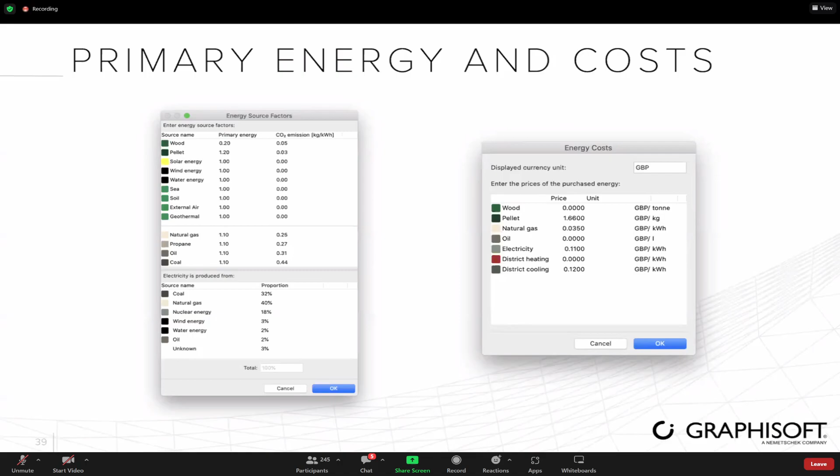Energy costs - you can choose the units, it's just going to be a text. For price, you just have to look up the energy bills. And this, all in all, will contribute to the calculation of the overall impact towards the environment, and this is going to tell you the yearly energy cost - how much you have to pay to operate the building. So this is going to be really useful to have these numbers. And basically, this is what happens at the last part - you can compare with the baseline building. So in the report, you can see the cost - in this case, it is British pounds per year.

And when you apply the renewables, then you have a summary of that, how much energy you generate with the renewable. There are some advisory messages. You can see the unmet load hours. This is the one that I mentioned, that the devices are operating with a slight delay, so they don't fulfill the requirements immediately.

And here is the comparative table, so you can see what you actually use versus what you generate with the renewables. So it means that eventually the cost is going to be this. The original baseline building was this, and the new one is this, which means that cost-wise you spare 82%, energy usage-wise 64%. Obviously it depends on what type of energy you use, so these two will not be the same.

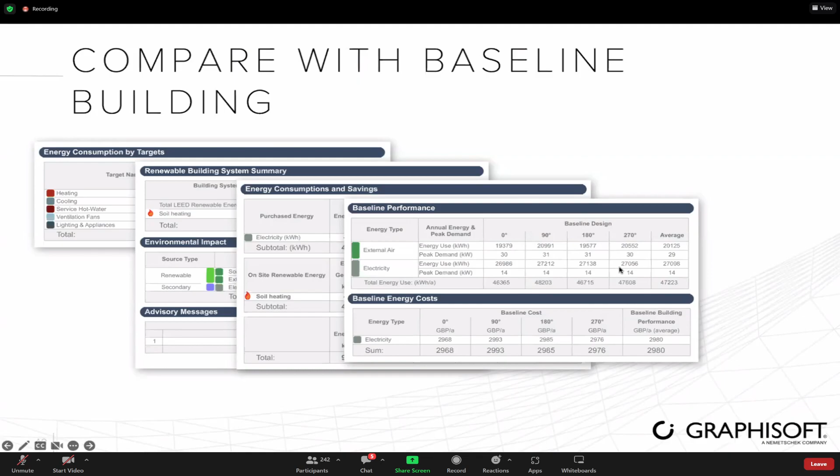Okay, here is another one. The energy simulation refers to the ASHRAE standard, which means we have to evaluate the building at its original orientation, but also rotate it 4 times, do the evaluation, and take an average of that, and that's the final result. So this is just the method of the test. That's why you'll see 4 different orientations here.

And then eventually there is also this performance rating table. Again, for different types of energy usage, you can see how the proposed compares to the baseline. It's very interesting that on heating, we're actually losing, so it's not a good solution in terms of heating, but we save so much on the others. For example, in case of cooling, you can see that from 15,000 we save down to lower than 2,000. So the almost 90% saving much more outweighs the inferiority of the heating solution itself.

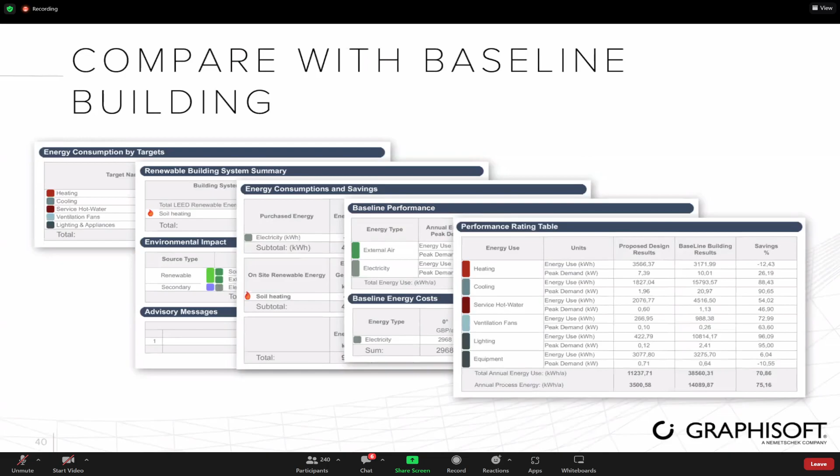So I think this is pretty useful, and it's very easy to show to everyone, and they can understand that okay, there's actually a result here, there's a reason why we're doing things the way we do. Okay, I'm going maybe a little faster so we're not running out of time.

How can we share this information with engineers? Archicad will support your design decisions and make sure you have reliable data, but it's not going to do the actual certification. There's usually an engineer doing these certifications. You can share the building energy model information through the GBXML file format. This is a green building XML, a free and open XML schema, basically the quasi standard for building analysis tools to communicate. So we can just export the building energy model in this format, and they can do the actual certification.

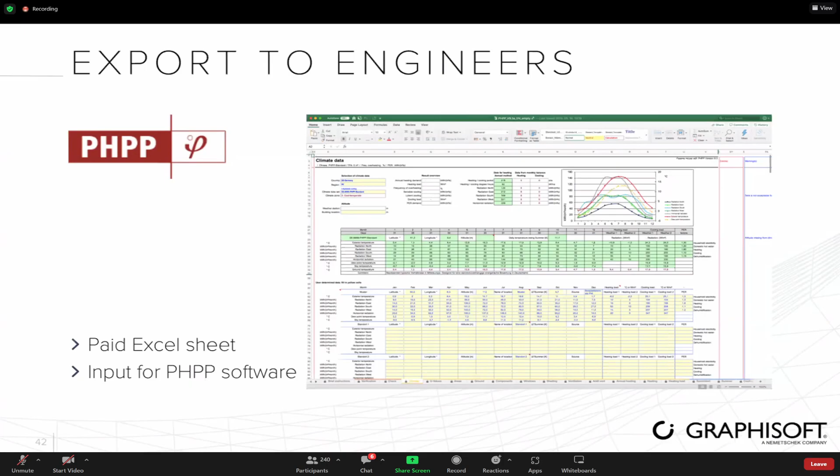There's another export format which is more related to Germany, Passive House, which is basically an Excel sheet, and we can just generate the input for this PHPP, the Passive House software.

So, okay, I told you a lot about the methods and the reasons why we're doing it, but is this reliable? As I mentioned about the 4 orientations, we have the ASHRAE certified simulation. ASHRAE is the American Society of Heating, Refrigerating, and Air Conditioning Engineers. This organization does research projects, but most importantly, they develop and publish technical standards to improve building services engineering efficiency, indoor air quality, and sustainable development.

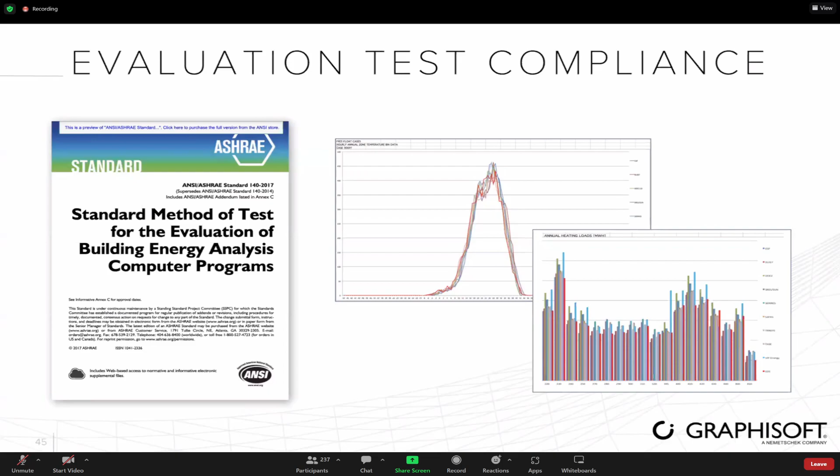So I think that's good news, feel free to use it. And basically, how well known is this thing, and what are those tools anyways? The simulation is the whole method itself, which is referenced by most of these major sustainable building design regulations and national standards, which endorse, use, and refer to dynamic simulations.

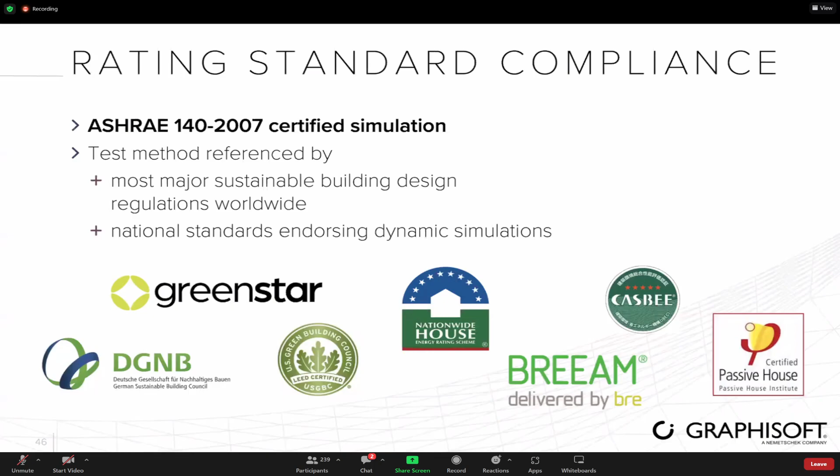So there are all these different types of rating systems in Australia, US, UK, and Japan. Green Star and the Nationwide House Energy Ratings Scheme are ratings in Australia. LEED is probably one of the best known ones, and BREEAM from the UK is one of the oldest ones. They all refer back to the ASHRAE testing, certified and simulation methods themselves. Okay, so that's why we are also referring to that as well.

So all in all, our goal is to make the best design decisions from the early phases and make sure that this is as easy as possible. I hope you see the benefits and understand now how it works and what is the concept behind it. And by that, I just came to the end. So thank you for your attention. I'm looking forward to the questions and the Q&A later on. Okay, so I'll just hand it back to our MC.

Okay, so first things first, we would like to thank Mr. Sandor Bali for delivering the materials that opens up new insights for each and every one of us. As already explained, in green building design there are incentives and deterrents. The incentives are required by the authority for certification, making better design decisions, and having a competitive advantage, etc. The deterrents are that it is too complex in general, not suitable for architects, and needs additional software where more time and energy are spent.

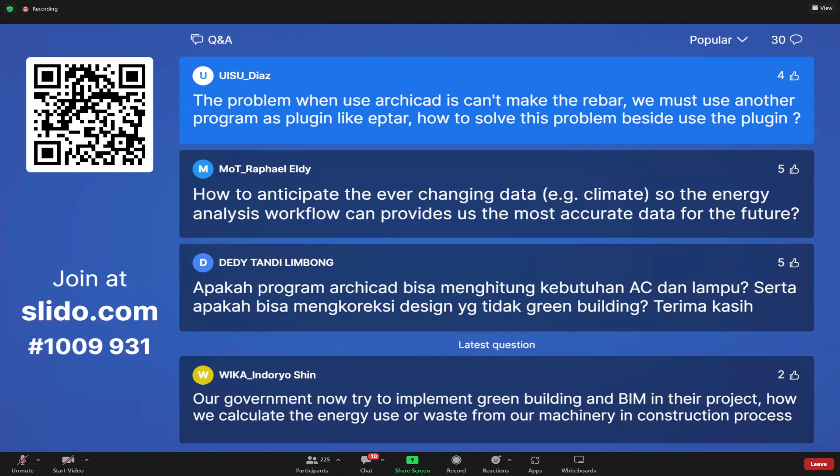The problem when using ArchiCAD is that we can't make the rebar. We must use another program as a plugin, like Eptar. So how to solve this problem besides using the plugin?

I'm not sure how this one is directly related to energy evaluation, but probably this would also be a thing that we would exclude in the energy evaluation. So rebar—I know that in Eptar you can create those very detailed rebars, but actually they can really make the project heavy. So typically we use them only on very standard details of the building and not throughout the whole model, because for a high-rise building it would just create so many polygons that it would be impossible to handle.

But even from an energy evaluation point of view, the composite structure or the concrete structure that we're using in the model, without the rebar, already contains the physical attributes of reinforced concrete. So rebar is not needed when we do the energy evaluation. I can't really see how these two are connected in this case, but yeah, we don't need the rebar.

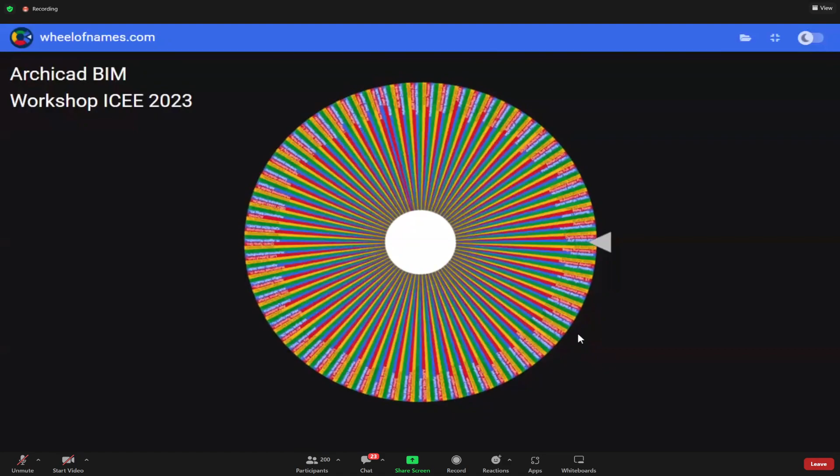Untuk pemenang pertamanya, selamat kepada Saudara Rizky Robi Rahman Alam. Kepada Saudara Rizky, diharapkan untuk dapat menghubungi langsung kepada Saudara Stephen. Kemudian, sekarang kita akan mengundi terakhir untuk melihat siapakah yang akan memenangkan door prize terakhir kita pada hari ini. Selamat kepada Saudari Dia Kartika Indriadi, kepada Saudari Dia dapat langsung menghubungi Saudara Stephen untuk mengklaim prize-nya. Dan untuk Saudari Dia dan Saudara Rizky Robi tadi diharapkan untuk dapat raise hand terlebih dahulu.

Acara selanjutnya akan dilakukan penyampaian sertifikat untuk pembicara pada hari ini, yaitu Bapak Sandor Bali oleh Ketua ICEE 2023, Mas Romi. As a form of appreciation, honor, and gratitude, we are proudly presenting today's speaker, that is Mr. Sandor Bali, a certificate. It will be delivered by ICEE's project officer, that is Mas Romi. For Mas Romi, we welcome you to give a brief remark.